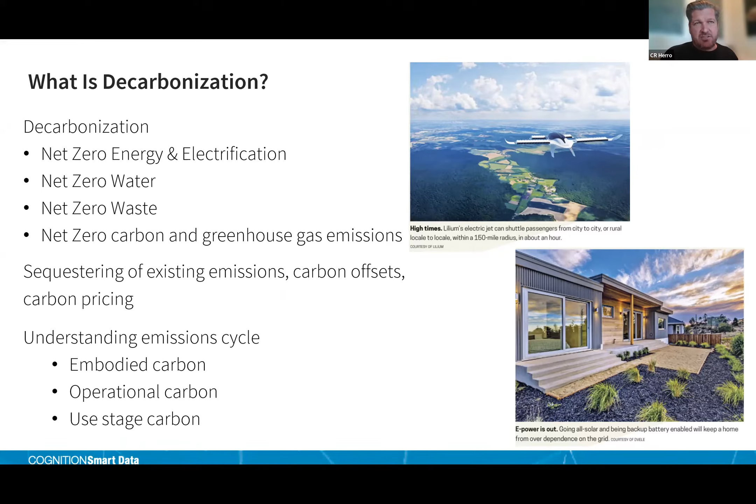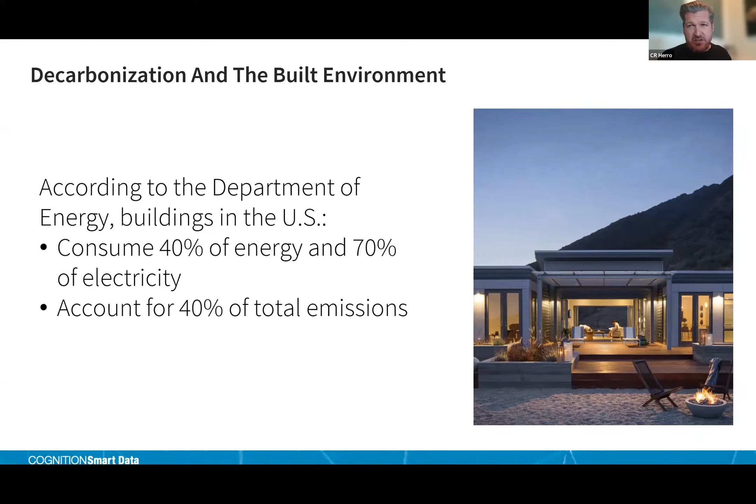Carbon accounting and energy accounting give us the tools to understand the magnitude of the problem and to prioritize and identify strategies that have the most impact. But buildings consume 70% of the electricity, 40% of the net total energy, and therefore account for 40% of total emissions. Buildings are incredibly bad at using energy, water, and materials efficiently.

When you look at the consumption of energy by a building, for every 1,000 units of energy, only half of it actually gets consumed as useful impacts to human life. The other half goes out the door, wasted. So a big opportunity is to talk about eliminating waste.

Another big opportunity is talking about, can we sacrifice some of the lifestyle without it being painful, to further reduce that? Decision makers, whether it's municipal government, home builders, or supply chains, don't have a problem because they're busy and they're selling things. So there's a lack of effort being applied to a problem that they don't feel.

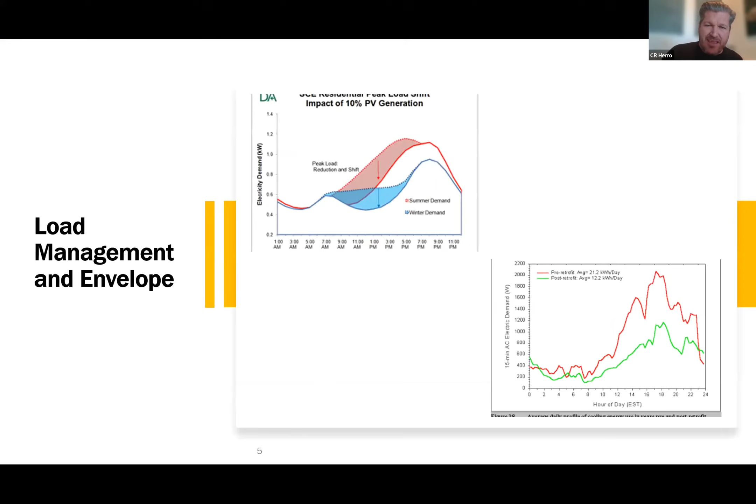The negative consequences are changing the environment, accumulating in our landfills, and impacting intergenerational quality of life in the future, because people just don't perceive the significance of the waste and the poor consumption of energy as it occurs today. So there's this problem, where buildings are this massive consumer of energy.

The consumption of energy produces global climate change and contributes to a massive negative impact on the sustainable nature of our globe. In the upper left corner, the dashed blue line is the normal consumption in the winter, and the dashed red line is the normal consumption in the summer of energy in a residential home.

When the sun comes out, if you've got a 4 kilowatt array on top of that building, it can produce energy and reduce the consumption pattern to the solid line. What it means to utilities is they still have to have all the infrastructure and cost, whether you have solar or not, because look at their peaks—their peaks are the same in both scenarios.

So the pushback from a utilities perspective is: you didn't do anything that allows us to pass savings on to the consumer. You made energy when I didn't need energy, and great, it reduced your energy demand, but it didn't change the grid. That's why demand side energy management is the topic of the day—this is the beginning of the problem.

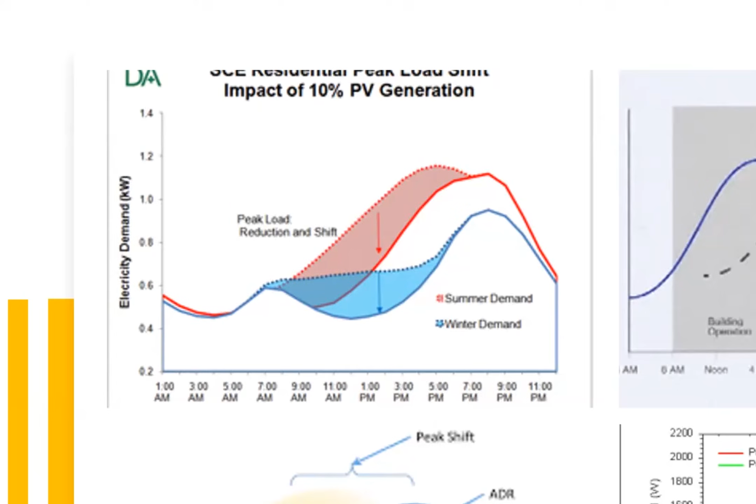So we can start doing things, which are shown in some other of these graphs. The upper right corner is if we think like we thought when we built houses before there was heating and cooling—we do things called thermal mass.

During the day, they warm up, and it takes a while before that heat in the summertime makes it into the conditioned space. In the winter, they hold that heat, and it takes a little bit longer for that heat to be let go. What that does is it delays and reduces heating and cooling costs.

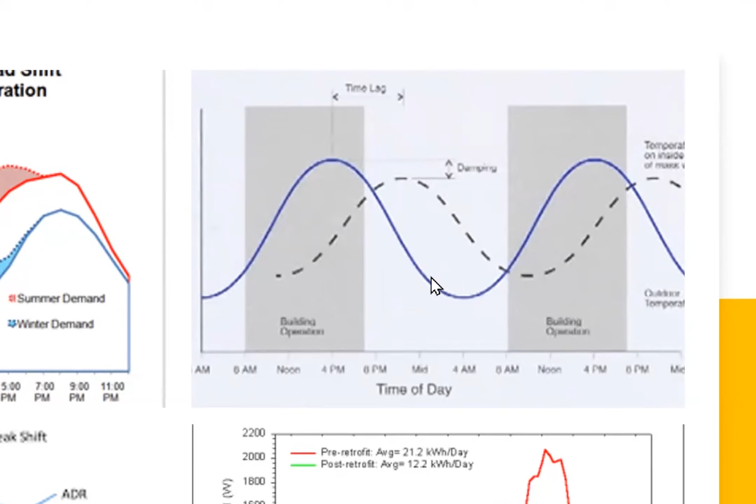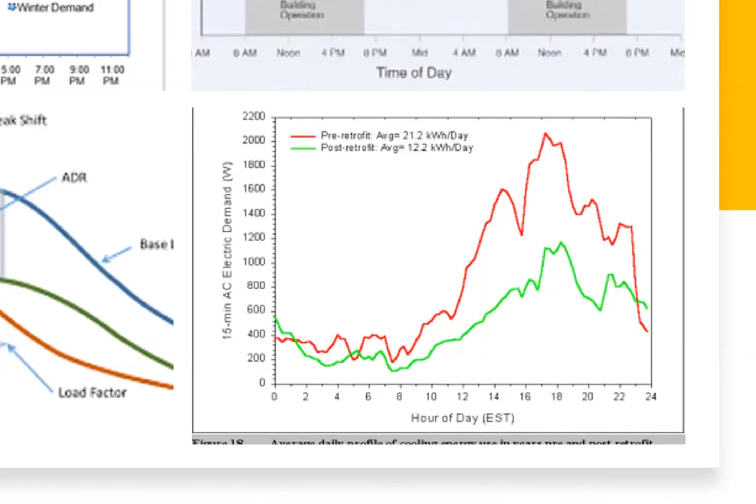The lower right corner is just the impact of energy efficiency. Instead of that red line, which is a conventional home, you shift it down to a lower energy demand and reduce the peak. So we think about those load shifts, and we think about solar, and we think about load shifting.

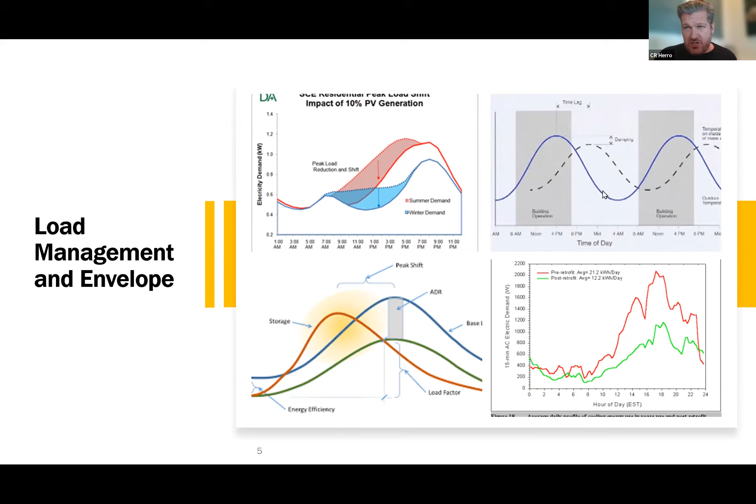There's pieces of the solution in there, and all of those pieces are called demand side energy management. It's how we start taking the lifestyle behavior of humans and the way they consume energy, and start applying construction, science, and physics, and load shifts to start moving that energy around.

Then we'll couple it with things like, can we be smarter in our heating and cooling system? Can we change the way we orientate solar so it makes energy farther or closer and overlaps those peaks? And number 6, the fix for all of everything: can we take all that energy we make in the middle of the day, put it in a battery, and discharge it when the sun goes down to make better use of it?

And the answer is yeah, all of this works. All of this costs money. All of this costs carbon to manufacture. So we have to find a balance that at net creates a recipe, as it were, to consume the least amount of energy necessary for society to function well, and have something that has low embodied carbon cradle to cradle.

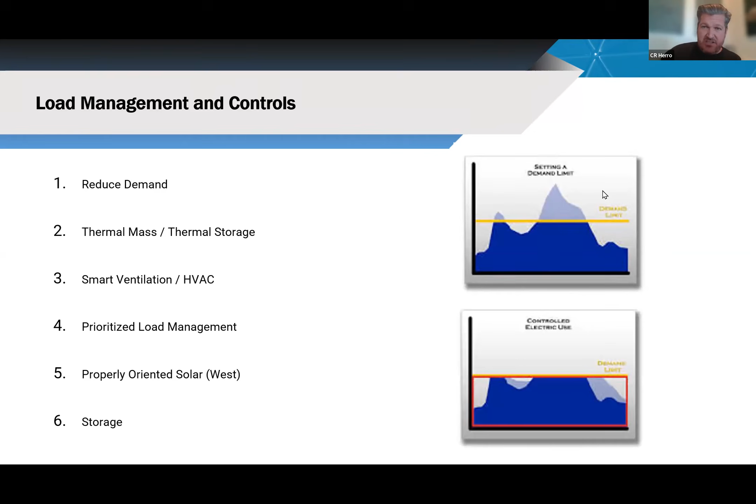So what we're really trying to do is take all of those peaks through all these strategies and create this level. Utilities can do this and create a lot more harmonious use of generated power and consumption of power when more thoughtfully designed.

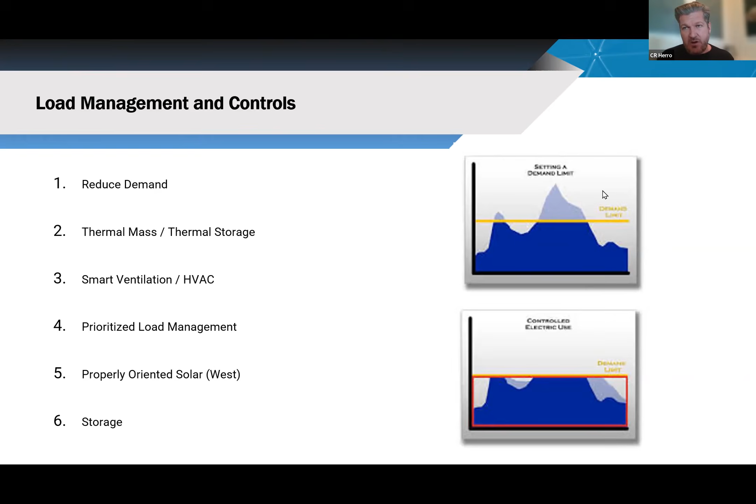The honest answer is we just don't do that, because nobody's been incented to not just turn things on when they wanted it. So there's things happening that will create a cost to consume energy at peak. It's called time of use.

If we have a higher cost of energy during that peak, because utilities incur a higher cost of energy, then we could cost justify, or at least behaviorally incent, people to preheat their house before the peak heating demand, or run their dishwasher when the energy's cheap.

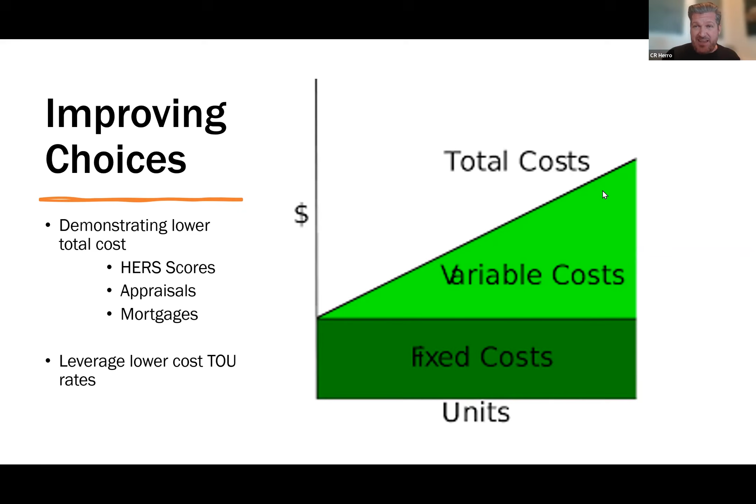In the United States today, that diurnal curve—where we consume a bunch at a peak and then consume a little at a trough—costs our society $1.2 trillion with a T every year in inefficient energy production and consumption. If we just did the things we talked about—smarter construction, smarter appliances, a little bit of battery storage—that $1.2 trillion of social costs that we all cumulatively pay for an inefficient grid becomes available.

Available to do things like pay teachers, pave our roads, go to a greener economy. It's an amazing stick and a carrot that, if we leverage it well, we can start taking those energy efficiencies and start making much better decisions.